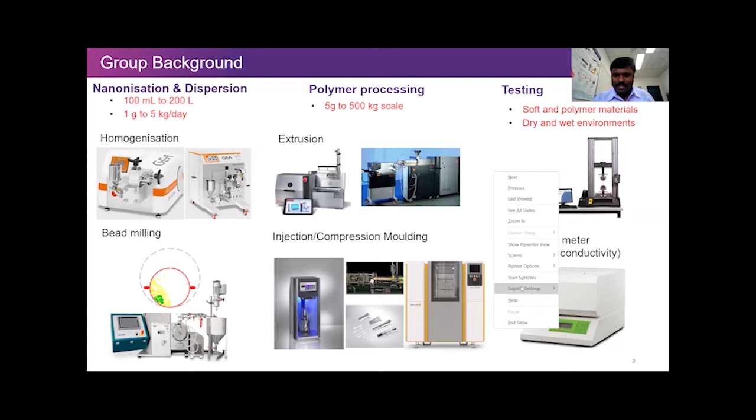So this is a brief background of our group. What I'm going to talk about today is in terms of sustainability.

Especially after this post-COVID situation, we have to look for our lifestyle and how we utilize materials, how we exploit resources. So towards that, we have to think about sustainability.

In sustainability there are three factors: environment, economy, and society. The UN has also set up development goals that we have to achieve by 2030, and most of our research aligns with those development goals.

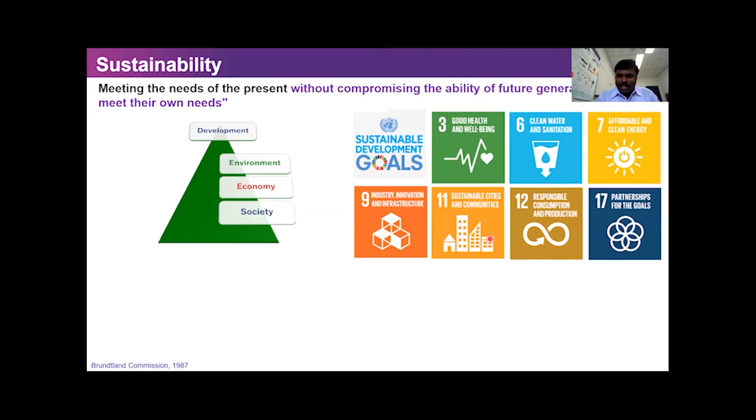What we are good at is materials. From a materials point of view, sustainability is all about making materials that are accessible to the wider community, which involves cost-effective processing, renewable raw materials, and cleaner and greener processing.

It also involves less materials and energy consumption, and materials that have renewability and recyclability, and low or no environmental impact, and most importantly, having performance during the service life, and also improving that service life.

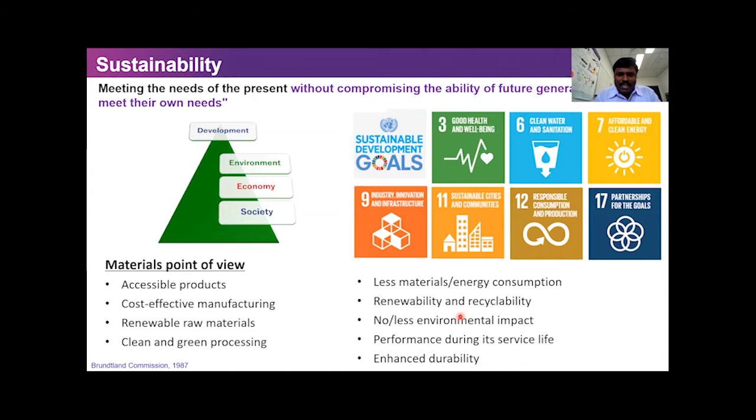So these are, from my point of view, the materials towards sustainability. What I'm focusing on is the building materials for the future, which involve mostly lightweight materials.

And also the more renewable, greener materials, with less processing. There are different materials like cement, concrete, geopolymer, and foamed plastics, and what you're seeing in the background are those different materials. Today I'm going to concentrate on cement and concrete.

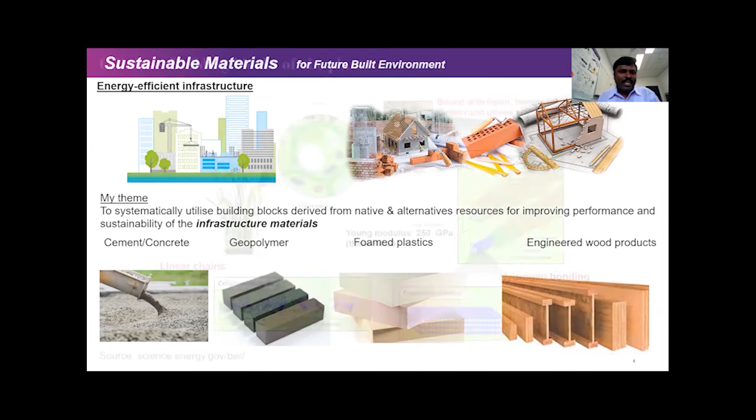So we are looking at making nanomaterials from renewable sources. Cellulose is the most abundant building block available in nature, in plants, and even in some marine animals. In the plant cell walls, if you deconstruct them, you find polymers called lignin and hemicellulose.

If you go further, closer to the nanoscale, you have cellulose as a crystalline material embedded in the hemicellulose and lignin matrix. If you deconstruct back into this nanoscale, we can exploit the mechanical properties it offers, and the chemical functionalities it has, the OH groups, since it's a linear polymer. We can exploit these functional groups and the mechanical properties.

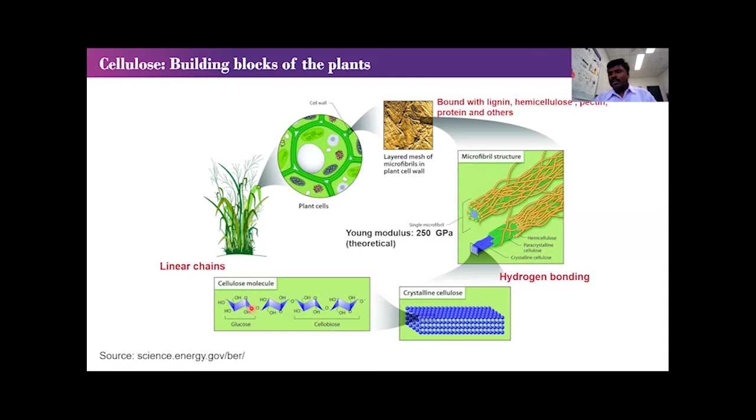It has really low density compared to other inorganic materials. And when you go to the nanoscale, you increase the surface area, making more hydroxyl groups available for functionalities. These are the attributes of nanocellulose: it's renewable, and we can make different shapes and morphologies of fiber.

For example, we can reduce it to nanocrystals, rod-like nanocrystals, or filament-like fibers. With classical organic chemistry, we can modify the surfaces as well. And as discussed earlier, it has high mechanical properties at really low density.

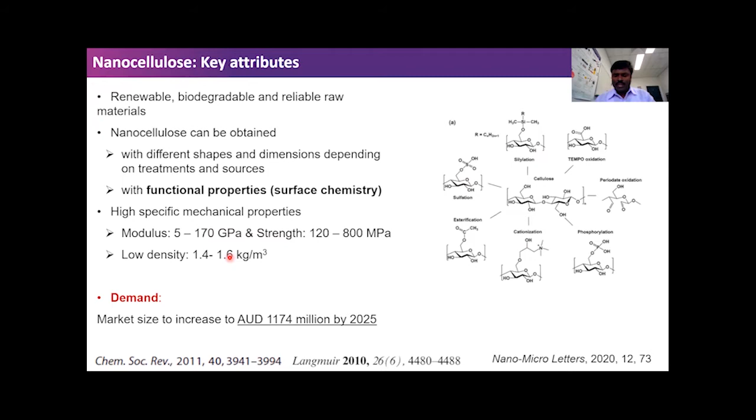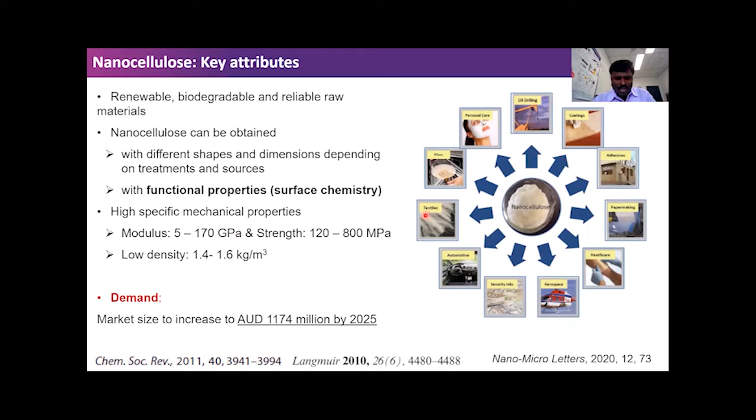Because of this, it has a really wide range of applications, starting from personal care, industrial applications, to automotive and aerospace. It's a large area that we can cover with this small nanomaterial, and the demand for it is increasing.

We can get nanocellulose from any biomass resource. It's not that difficult.

The other thing about the lignocellulose resource, where we have lignin, hemicellulose, and cellulose, is that we can tune the composition internally, and also in the bulk and on the surface. This implies that when you have a high amount of lignin, it becomes less hydrophilic. When you remove the lignin and hemicellulose completely, it becomes more hydrophilic and polar. So that's the kind of functionality we can change.

That's one thing we can have. Especially the non-wood biomass sources have a higher amount of hemicellulose, which is a kind of thermoplastic polymer, making that fiber tough and flexible. So you can actually make a tough paper from this nanofiber.

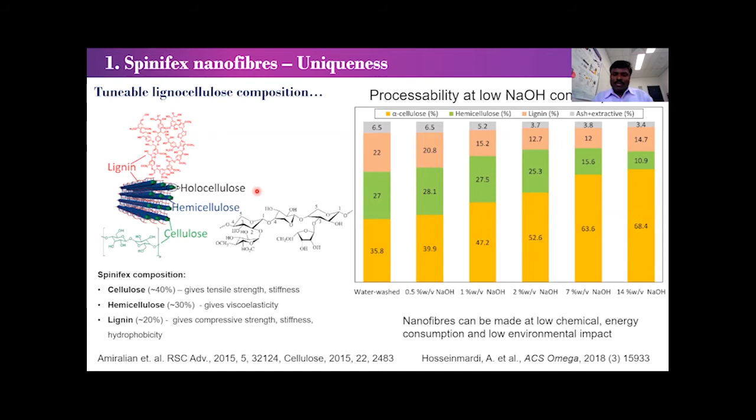This was invented in 2013. Because I come from a background in CNC, which is rod-like nanocellulose, when we saw this particular fiber, we were so excited about the toughness we could get with the nanofiber. That's where we went into protecting the IP.

When we compare spinifex nanocellulose against other examples, the rod-like nanocellulose stays at a higher cost, because you need to treat it with acids or oxidizing agents to get that nanocrystal type.

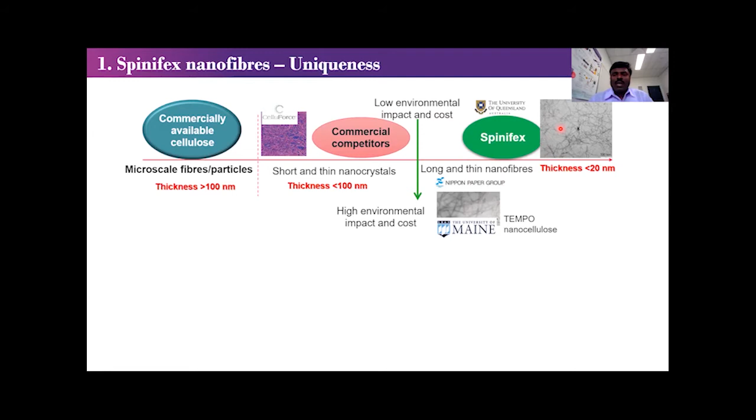If you want to have a nanofiber like this, you'd normally have to do other oxidizing treatments. But our spinifex, without any such treatments, gives us that long, thin, and tough nanofiber.

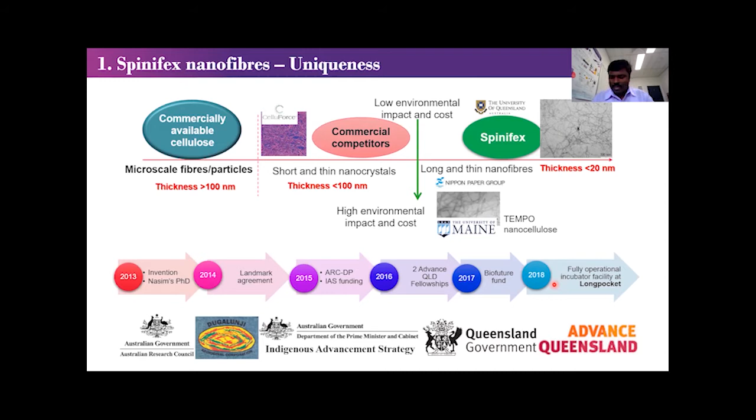We started around 2013, and now we've received grants from the federal and state government, and had a partnership growing over the last 8 years. Now we are fully operational at pilot scale, producing about 5 kilos of nanocellulose a day in our plant downstairs.

It's not only about making nanomaterials, it's more than that. We have indigenous partnership and training, plus material applications starting from recycled paper, where we improve the strength just by adding a few percentage of nanofiber, and also cement strength, elastomers, rubbers, gloves and condoms. These are products where we can improve performance and durability.

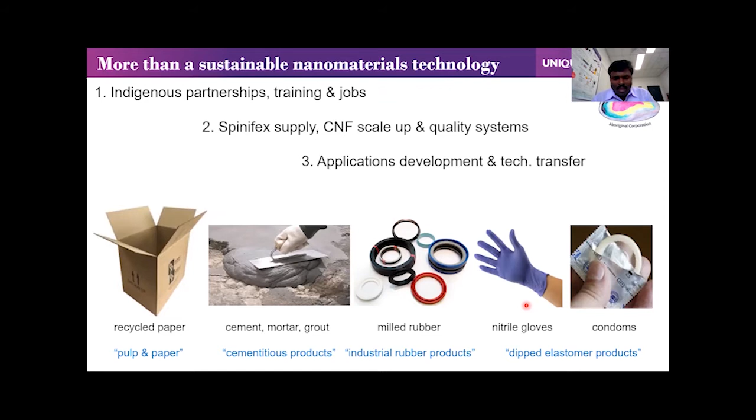We also train people in most of the downstream process, from screening and cutting the grass, to washing and making the pulp, then making the nanofiber. We train very often, and we've had a few visits from indigenous trainees.

Today I'm going to talk about one of the construction materials, which is cement. The process involves mineral mining and exploitation, plus grinding and heating to more than 1,000 degrees Celsius to get calcium oxide and silicon oxide, silica, or alumina.

You start from the minerals, and you heat it to get oxides, so you get a micro scale powder. When you add water, it becomes adhesive, making a stronger material. That's a bit of the basics on making cement material.

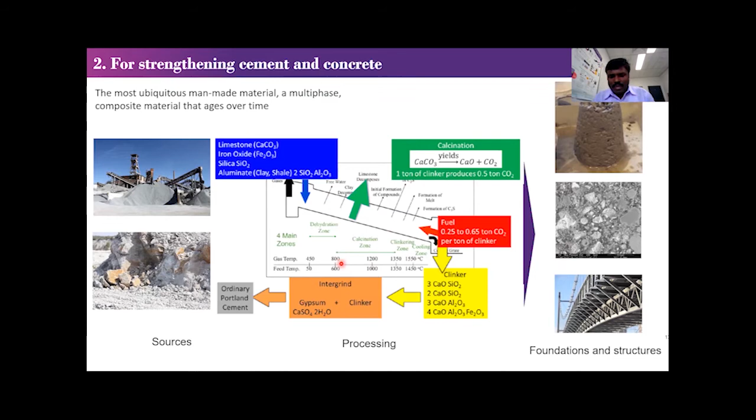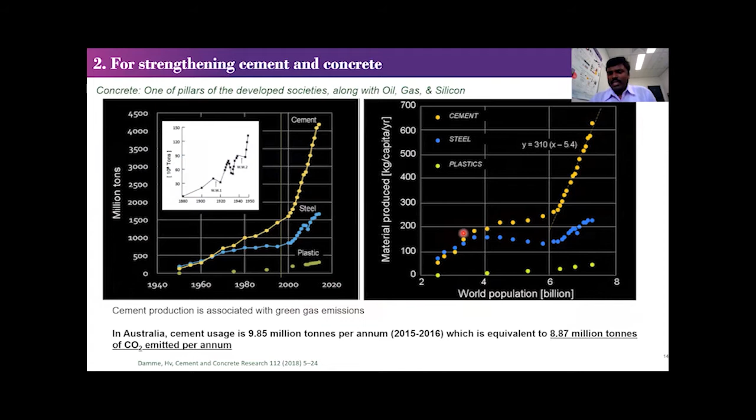But when you look at this particular process, it involves greenhouse gas emissions. We are using cement and concrete to improve our lifestyle, but with increasing population, consumption of cement is going to increase, and it's associated with greenhouse gas emissions.

To reduce that, to reduce the material consumption in cement and concrete, what we can do is improve their durability or performance, so that we can reduce the maintenance cost and also reduce the amount of material that we use.

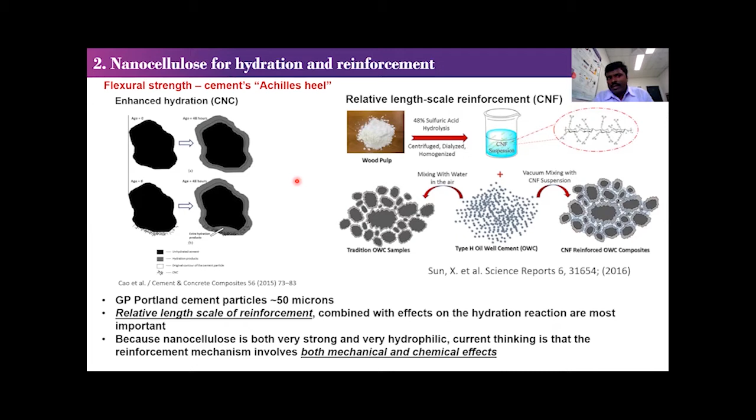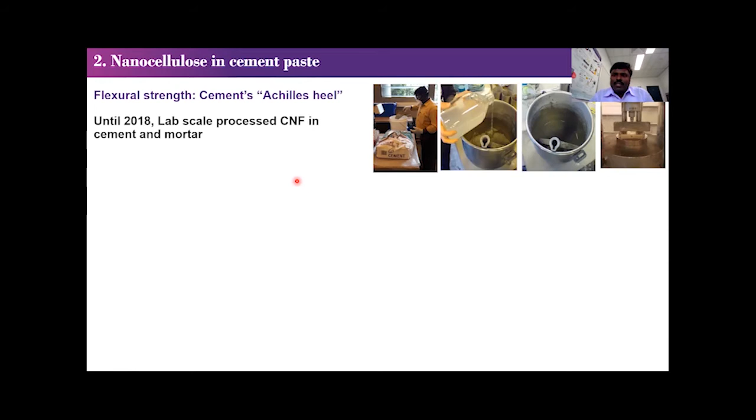That's where our industry partner, TMR, was interested in improving the flexural strength. We started with simple type 1 cement, which is general purpose cement, and tested about 6 types of nanofiber with different surface chemistry, doing oxidation and acid hydrolysis to get different surface chemistry. We got really good properties with the oxidized and acid hydrolyzed nanofibers, about 25% improvement in the flexural strength of just the cement.

We also tested with sand and fly ash, which makes a mortar, and got up to 20% improvement. This was done at the lab scale processing.

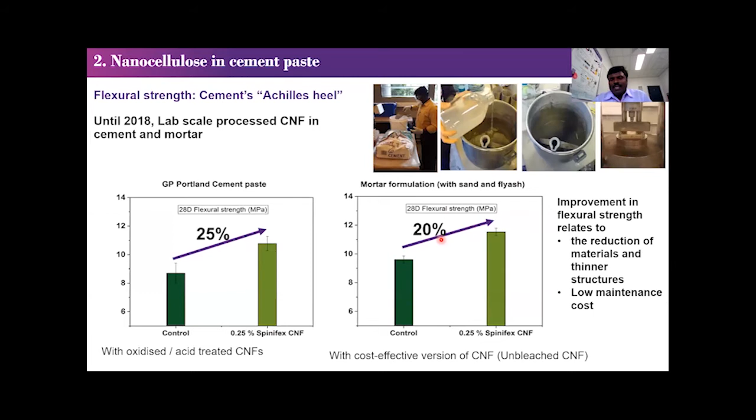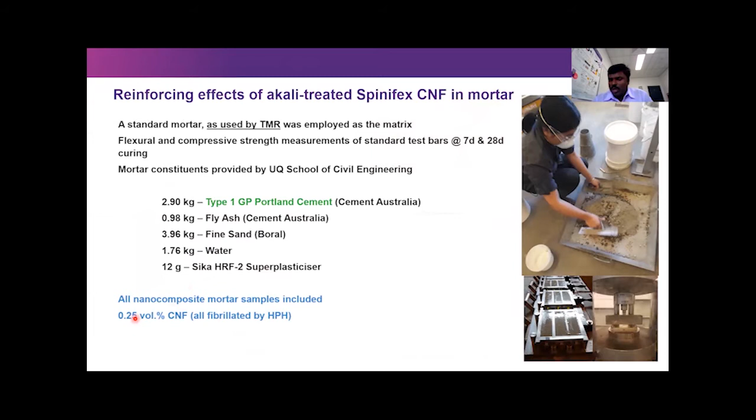And then we were trying to scale up this process. So we tried this at large scale, with the recipe here, which is cement, fly ash, fine sand, water, plus plasticizer. We added only 0.25 volume percentage of CNF in this, and we tested different processing variables.

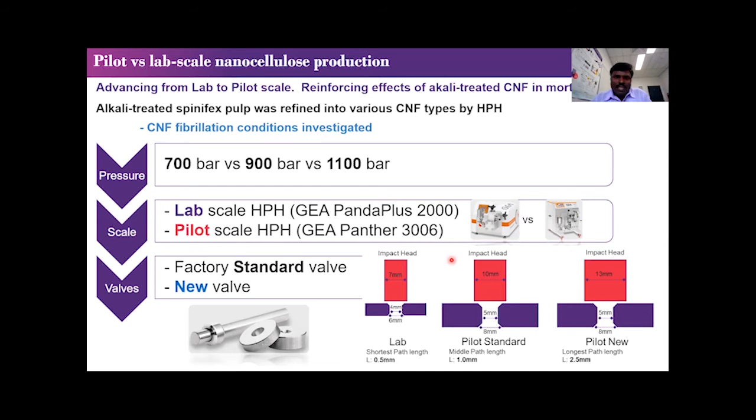We varied the scale of the nanofiber-making homogenizer versus the pilot scales that we have, and also the different valves within the homogenizer. The different lengths actually affect the fibrillation efficiency. After the mild alkaline, sodium hydroxide treatment, you get pulp which is bundles of nanofibers, so you need to apply shear treatment to get the nanofiber. It looks simple, but it involves several variables to get well-defibrillated nanofibers. So we varied all this, and they influenced the properties.

When we compare the lab scale and pilot scale, what we are seeing is that we needed to go for a higher number of passes and more time of homogenization. It's taking from 9.5 MPa to 11 — not a great improvement when we went into pilot scale.

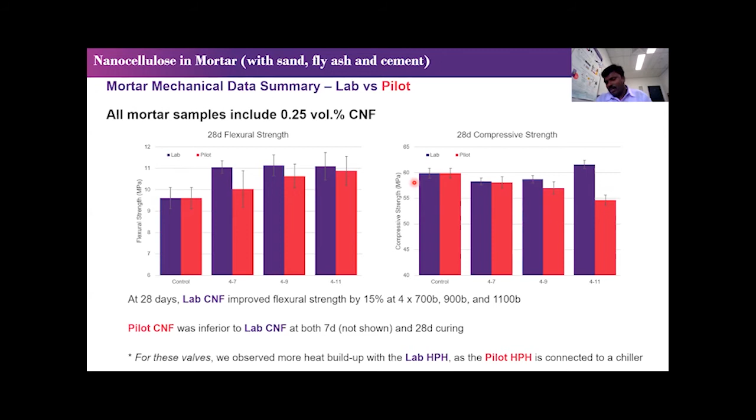This was at larger scale, and we tested it with one of our industry partners, and then we had to change our valves. So we repeated it and got that improvement back, about 20% improvement.

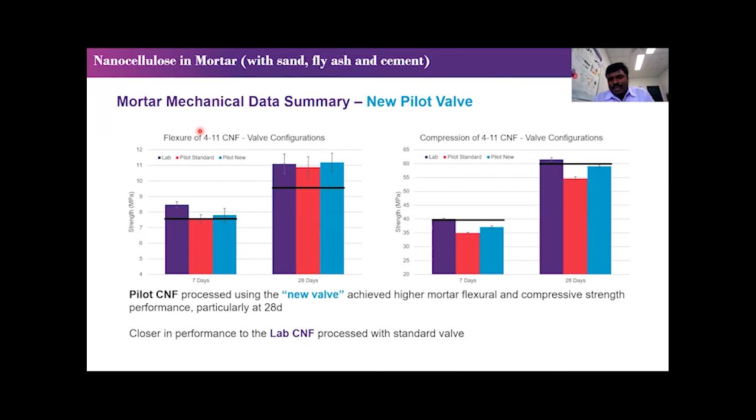We also tested adding an accelerator, because up to this point, this fiber is less processed — meaning the sodium hydroxide treatment went directly into the mechanical treatment to get nanofiber, with no other additives. We learned that this reduces the rate of curing or hydration, so we promoted curing by adding an accelerator. That helped us, as seen in this graph — we could improve the strength of the mortar by about 18%.

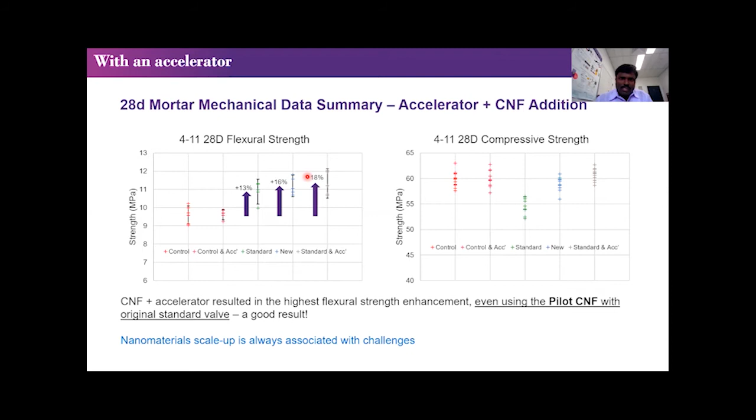These are the large-scale plots. So we could improve that even in large-scale processing. That's about adding nanocellulose to construction material.

Nanocellulose itself is a versatile and functional material, because we can do lots of chemistry and physical morphology changes. Spinifex is unique and endemic to Australia, with unique properties because of its leaf anatomy and high hemicellulose layer content. That helped us look into a wide range of materials, from soft materials to really rigid materials like our cement and concrete.

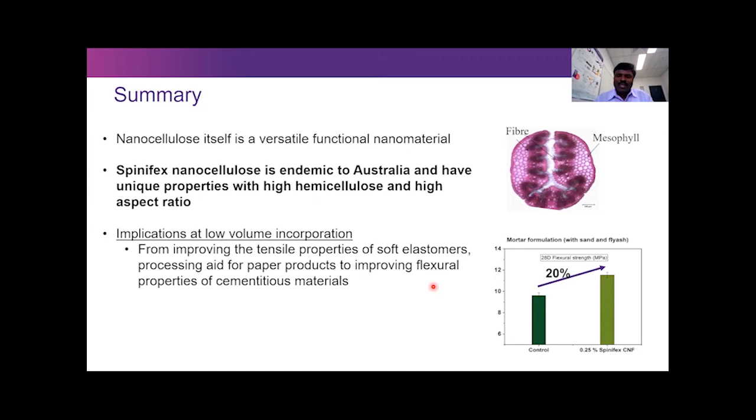I acknowledge our partners and the support from both federal and state government, especially my Advanced Queensland Fellowship, and I also acknowledge support from my team members. Thank you for your kind attention today.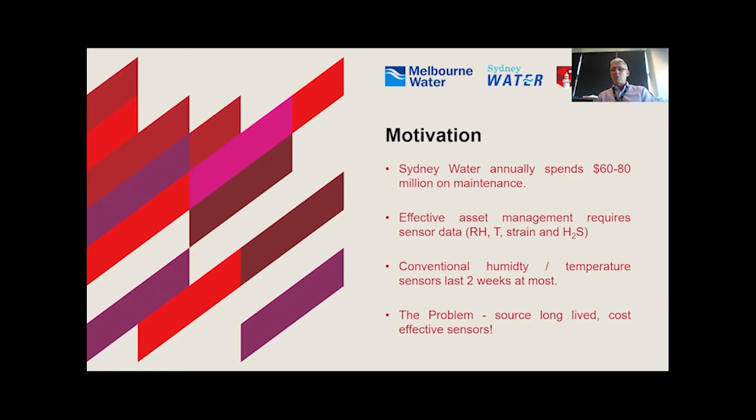The real problem they have is that when they use conventional humidity and temperature sensors in their wastewater systems, they would at best last 1 to 2 weeks. So the problem they put to us was, could we come up with a long-lived and cost-effective sensor, long-lived meaning something that will last for years? So just use OptoFab and ANFF as the jumping off point.

OptoFab actually bridges the gap between conventional milling and machining job shops. On the left-hand side, I show the smallest drill bit you can buy, 150 microns in diameter, the smallest feature you can have made in a conventional job shop. Inside it is a tiny hole which is laser machined, nicely illustrating where precision laser microfabrication bridges the gap between what conventional job shops can do and where lithography picks up for nanometer resolution.

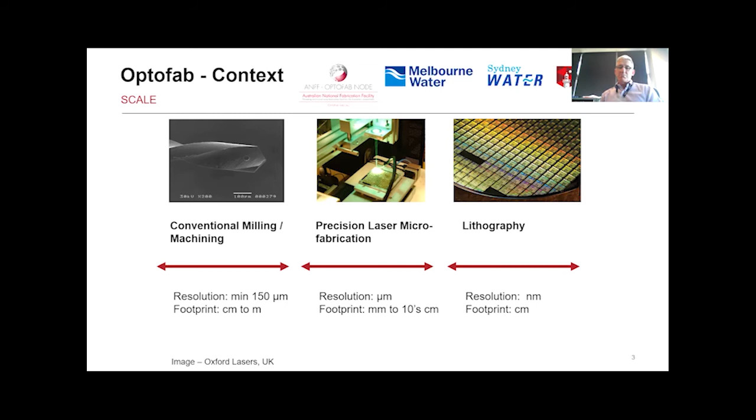This laser microfabrication gets you to approximately 1 micron resolution, but over a relatively large footprint. Perhaps the key thing is we're agile with respect to materials we can process—we equally do metals, polymers, glasses, and crystals. We're agile with respect to geometry: 1D fibers, 2D wafer surface processing, and indeed 3D as shown in the top right-hand image. That also makes us very agile with respect to the applications we target.

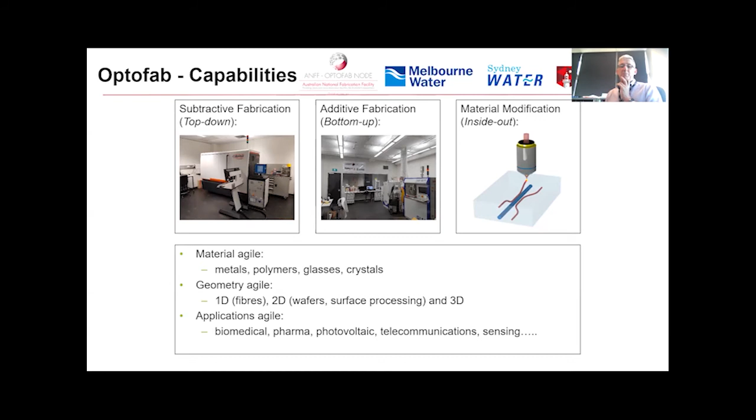OptoFab has loosely 3 basic thrusts to its capabilities: subtractive fabrication or top-down, additive fabrication or bottom-up—which we're all familiar with in these new 3D printing facilities—and something I like to call material modification, or inside-out processing, where we use lasers to modify the material properties of transparent materials, be it polymers, glasses, or crystals. Our sensing work draws on all 3 of those capabilities, and you'll get a sense of that as I go along.

Back to Sydney Water and their problem—and it's not just Sydney Water. The discussion started with Sydney Water, but Melbourne Water joined up midstream. This is the shared problem they have, and water utilities around the world have, that in wastewater pipes, particularly in the air volume, you get hydrogen sulfide gas, which in high humidity environments with a little bacterial action gets converted to sulfuric acid. This corrodes the concrete, turning it into gypsum, and can eventually expose the reinforcement bar and compromise the integrity.

The items of interest for us with respect to monitoring the formation of sulfuric acid are humidity, temperature, and hydrogen sulfide in the airspace, but also a strain and a pH front moving through the concrete itself as indicators of a corrosion event about to happen.

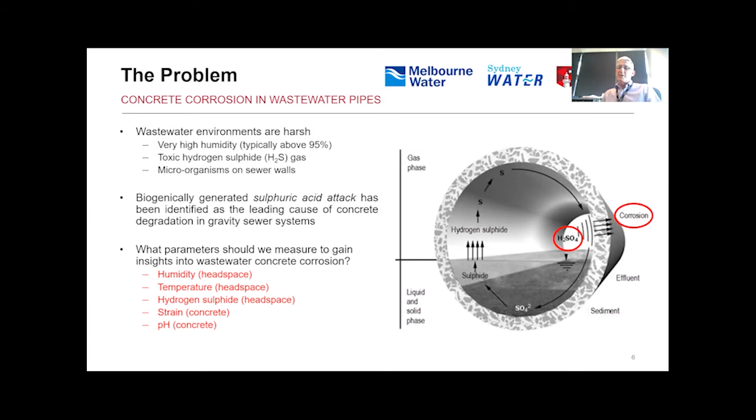This is what happens, this is how it manifests—concrete corrosion in wastewater pipes. You can see in the ceiling of that wastewater pipe that all the aggregate is exposed as the concrete that would normally cover it has been eaten away. Ultimately over time the aggregate will fall away too and eventually expose the rebar, and at that point teams of people have to go down at great expense to rehabilitate that section.

This is an example of some of the tests Sydney Water and Melbourne Water do, where they test concrete samples to try and make them more resistant to this corrosion problem in wastewater sites.

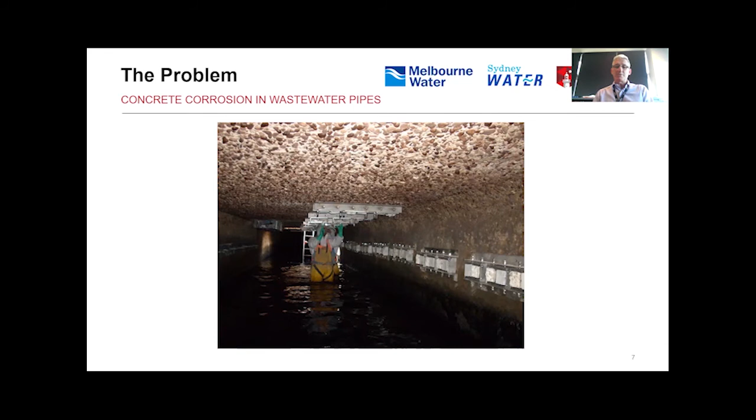The approach we took was something Sydney Water had already tested and shown to have durability in this space—using optical fibres, which survive well in corrosive environments.

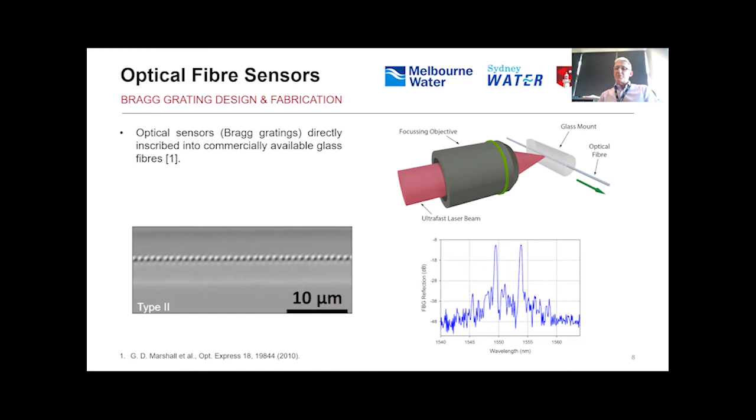This is where we use the unique capabilities of ANFF to use our inside-out processing to write Bragg grating structures directly inside the core of off-the-shelf, commercially available glass fibres. By making these periodic features with a certain period tuned to a particular spectral wavelength, as shown in that right-hand bottom graph, we can make little sections with unique spectral fingerprints that tell us something about the local changes that fibre has been exposed to—particularly if we've put a transducer around some of those little Bragg grating features.

Packaging is a big deal because we are in quite a hostile environment that's subjected to flooding events and all sorts of stuff flowing down these wastewater pipes. So we've invested a lot of time and energy coming up with clever 3D printed packages with little porous sections and often internal chambers to help with functionality. Ultimately, we have to keep in mind that Sydney Water, Melbourne Water and others want to deploy these in future in large volumes. So everything we embark on has to be scalable, and scalable at low unit cost. Our target here is below $30 per sensor.

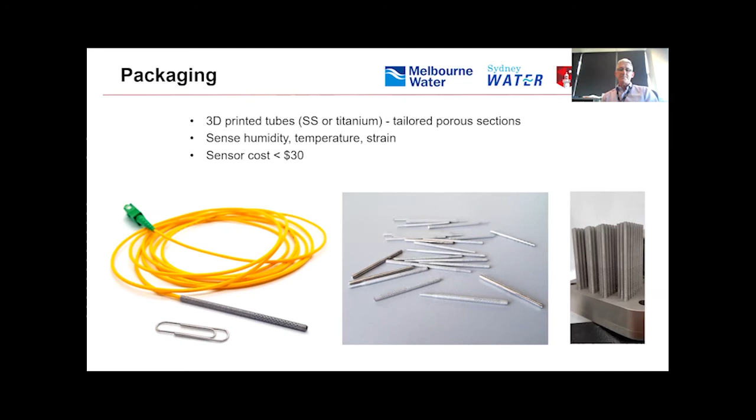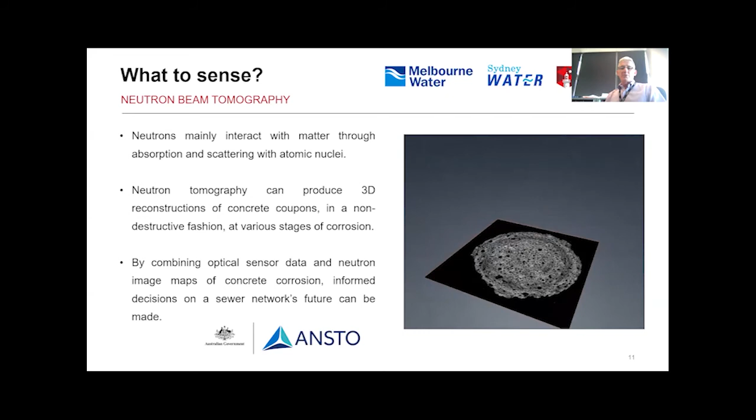Now we also have to know what we want to sense, particularly in the concrete. So we've done a lot of work with ANSTO doing neutron beam tomography on concrete samples that we put through accelerated aging and accelerated acid corrosion tests. As we scan through this concrete block in that animation, you'll see this black ring appear a few millimeters inside the surface of that cylindrical section. That's actually an iron ring, which tells us there's species migration that happens inside the concrete during this corrosion process. So these sort of tests give useful insights into how the corrosion front moves through the concrete, and indeed what are the sort of things we need to test to tell Sydney Water and others that they actually have a problem.

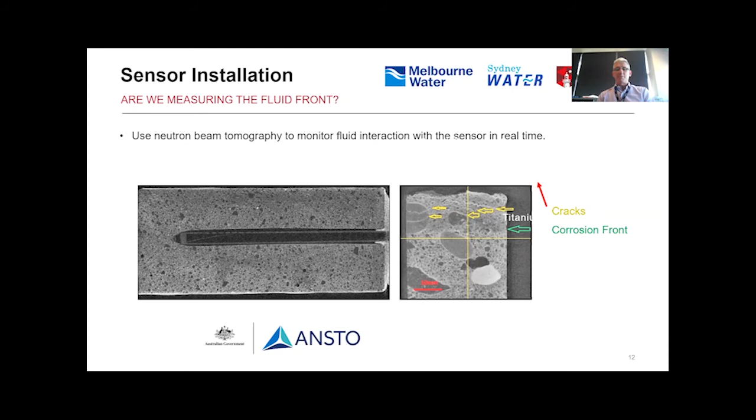This resulted in two strategic approaches that we have invested in. One is having sensors that can be deployed in the air volume of these wastewater pipes, and I'll talk a little bit about those in the next few view graphs. But also, with respect to inside the concrete, we knew it was never going to be feasible that contractors could be trained effectively to install these inside the concrete in a fashion where the calibration would be meaningful. So we've taken an approach where we use smart concrete coupons as almost a sacrificial corrosive feature that will be bolted on the inside of the crown of the concrete pipe.

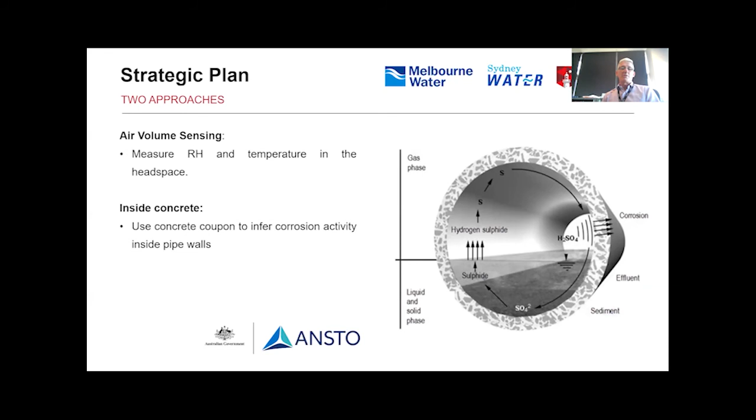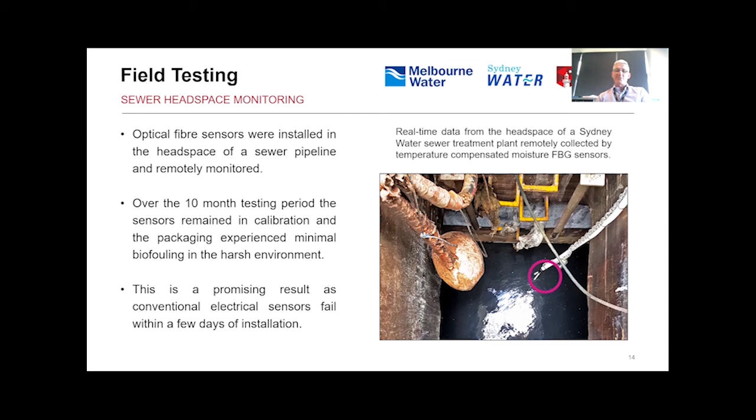But they performed as expected all the way through those nasty cycles. And this is what the data looks like—it tracks well. We had sensors outside that particular pit as well, and we were tracking them against the Bureau of Meteorology data, and they would certainly follow that accurately. Indeed, you can see reliable information there.

This is just taken over a few months in this case, but certainly the sensors worked as we had hoped over a 10-month period and survived a number of biofouling events.

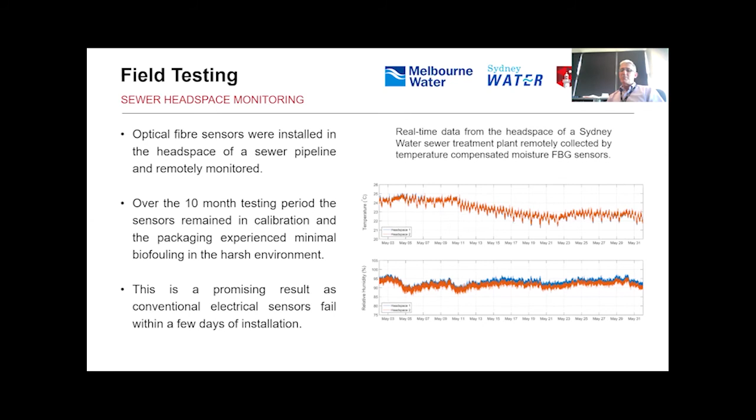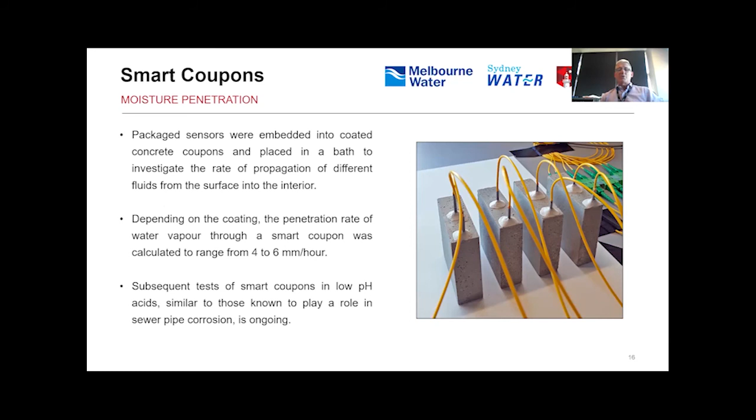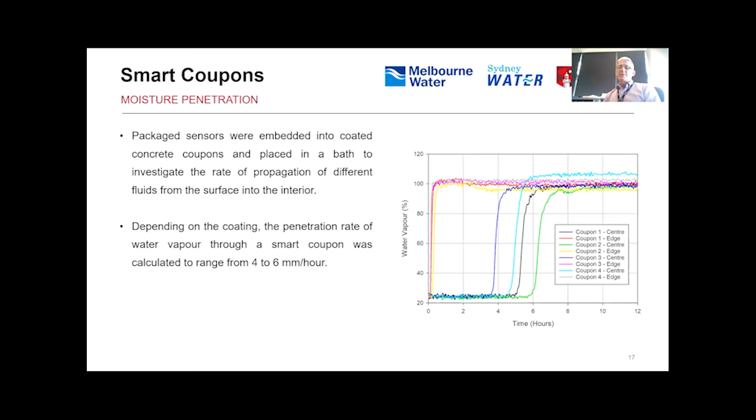With respect to our smart coupons, this is what our smart coupons look like at this moment. Again, we're making these in a calibrated fashion. They're installed, so we know the sensors will actually interact with the corrosion front moving through the concrete block itself. We've done various tests, such as shown here, where we can dip these in water and look at the moisture front as it tracks through a concrete block. Indeed, we're building on that by developing strain sensors as well.

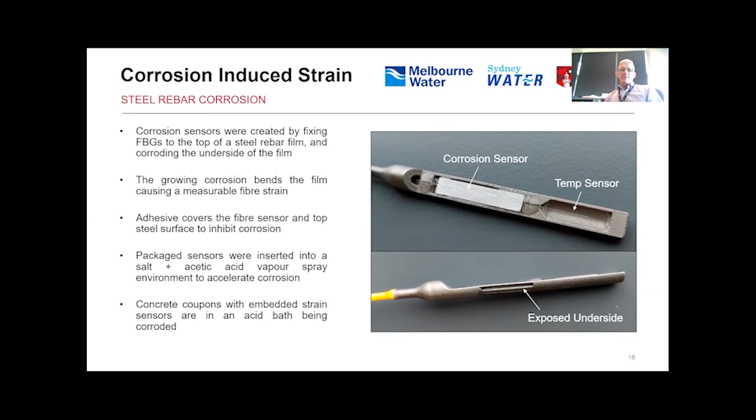We can look at the concrete as it starts to break down, as acid attack eats away at the concrete itself, and even look at the effect of pH before that corrosion event starts to happen. So we're developing pH sensors as we speak, and these are some of the examples we've tested to date. You can see there's a sophisticated arrangement of these fibre Bragg grating sensors that we make in-house, coupled with quite sophisticated 3D printed packages.

As I said before, this is certainly not a sexy area to work on, and it's hard to excite people about working with sewer pipes and wastewater systems. So why do we do it?

As we started to dive into this area, we realised this was actually bigger than just Sydney Water and Melbourne Water. A lot of the transport industry sector reached out to us too, interested in deploying some of our fibre sensors into motorways and things of that type. All of which seeded this idea, which came out of our linkage project with Sydney Water, and indeed which was all seeded by the original ANFF Roadshow back in 2015.

So we started on this CRC journey. We put a CRC bid in last year, and in that bid document ANFF features heavily. We were fortunate enough to be told in December last year that we were successful, and as a result, the SmartCrete CRC has been rolled out this year. We're just a few months into our life cycle.

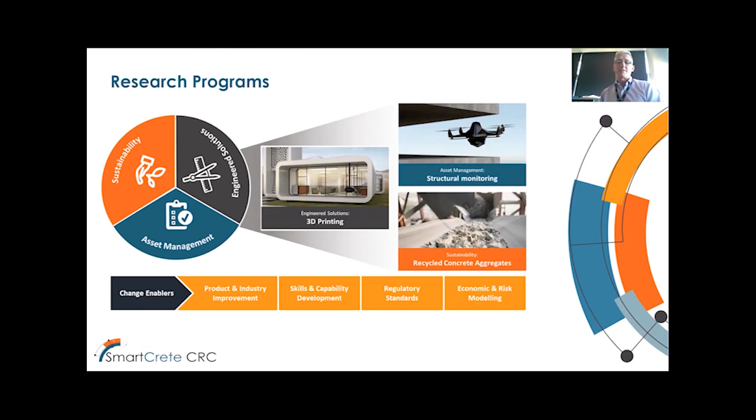Although our original thinking was this was going to be the SmartCrete, the CRC wasn't called SmartCrete at the time, but it would be mostly based around asset management. As we spoke to the construction industry in particular, we realised it was bigger than asset management, and so we expanded to include other aspects of the concrete life cycle, including sustainability, which the previous speaker, Prateep, touched on today, but also engineered solutions as well.

With that, I'd like to wrap up by again acknowledging the very strong support we've had from ANFF, helping us meet with Sydney Water at the very outset, and indeed helping us along this journey, developing fit-for-purpose sensors that would outlast the competing sensors at the time, which would only last a few weeks, and acting as a springboard for a suite of ongoing sensor development and new applications we're pursuing.

So with that, I'll stop and hand over to you, Jane.

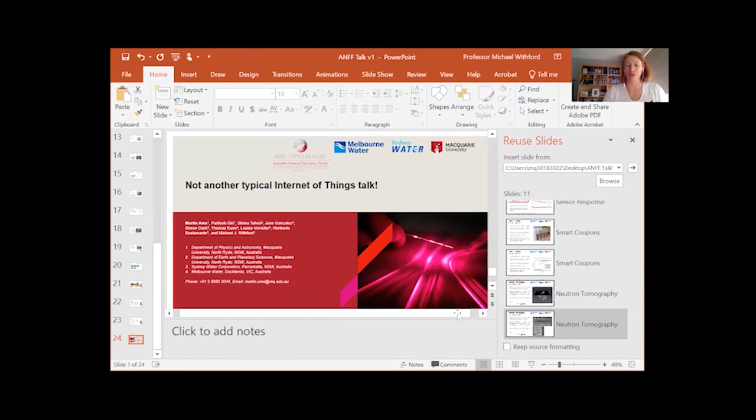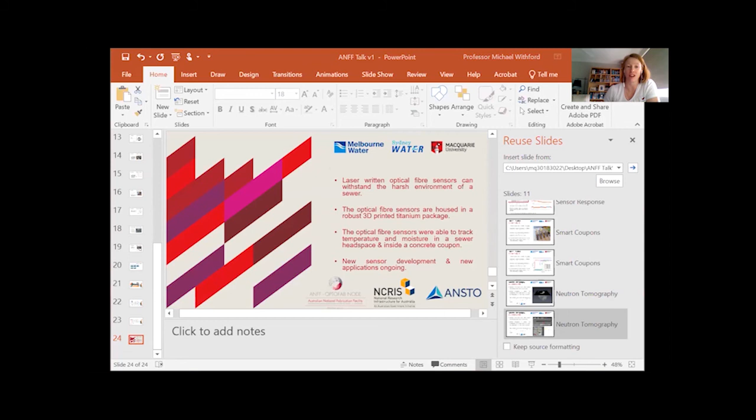Thank you very much, Mick. And as always, when Mick speaks, you'll understand the amazing benefits of having ANFF in your back pocket, and also the things that the partnership between ANFF, researcher, and finding a problem to fix can really provide a really powerful way of moving things forward in a lot of different areas.